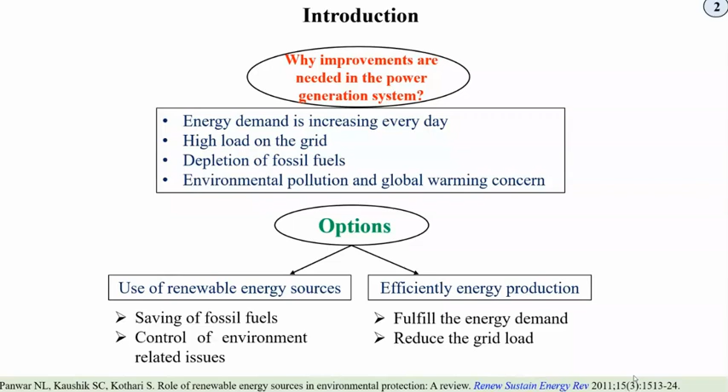And it is increasing day by day. These are some well-known school-level observations on the need for exploiting or harvesting renewable energy sources, and to reduce grid dependency, because for a country like India, more than 65% approximately is being catered by thermal power plants, which are fossil fuel based.

These are some consolidated projections of how renewable energy... some studies actually report, I said 60 but it's actually around 52 or so, but more than half is being fulfilled by thermal power plants, and we can see this renewable sector is not up to the mark. There are challenges, but the research that needs to be done has not been up to the mark, to say the least.

One of the key areas is waste management. If we talk about waste management, the staple food in India is agriculture, say rice and wheat, but the biomass generated from these agrarian resources is also not well managed, to say the least.

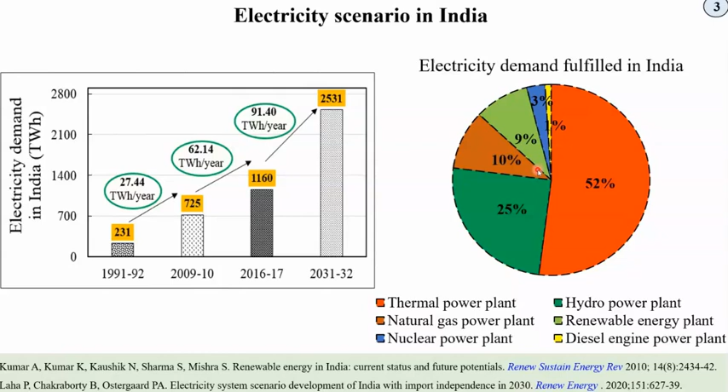So this is the energy demand and how it has to be fulfilled. These are some of the energy sources that can be found. We have been working on this—a few things like solar ponds—but this is not the main theme of today's discussion due to shortage of time.

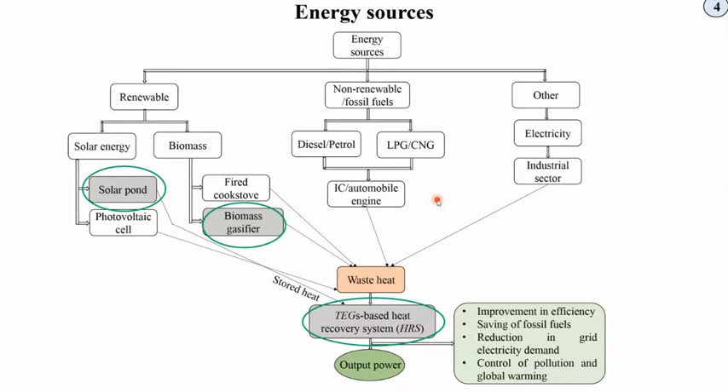I'll just focus on some applications of biomass gasification and what we have done here, how to improve it, and suggestions are also welcome.

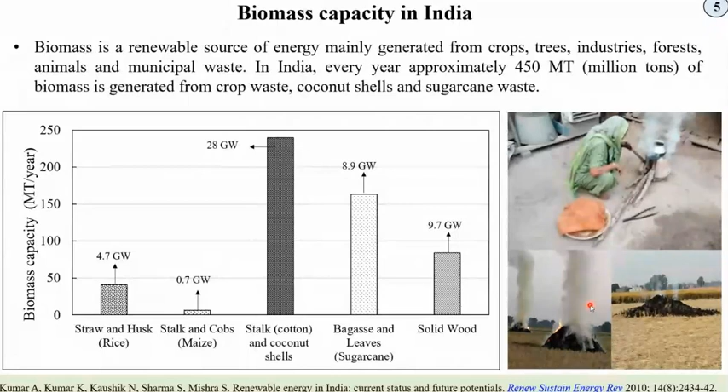We can witness this in our day-to-day life, even in remote villages. These are practices near a village at IIT Ropar, not taken from any published literature—these are real fields. Whenever the harvesting of the crop takes place, the farmers set fire to the field, creating stubble burning, disposal-related problems, and many environmental issues.

So these are the problems, especially in Punjab and the northern sector, and I'm sure it's taking place throughout the country, because farmers want to prepare the soil as soon as possible, and disposal of this waste is a challenge.

Now, what we have been doing—these pictures show field conditions, wooden scraps, and paddy straw. Since time is short, I'll go through the main techniques we are following and how we utilize this for useful purposes.

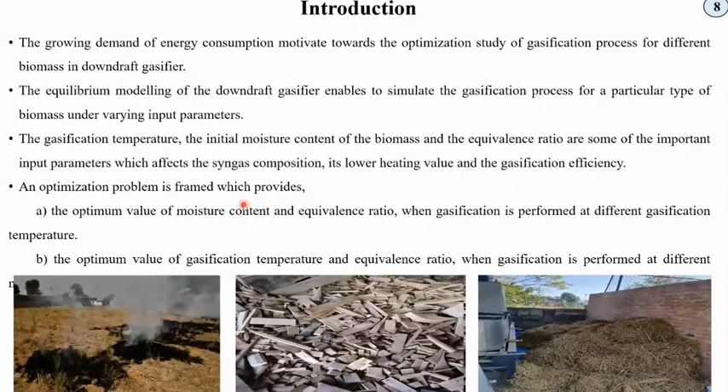First is biomass gasification. There's a lot of biomass involved. Before that, since students here are PhD or master's scholars, some basic theoretical analysis should be known—like ultimate analysis, proximate analysis, and so on. These can be done.

This is our biomass gasifier setup—a downdraft type biomass gasifier, which consists of a hopper and has zones like a drying zone, reduction zone, combustion zone, and so on. This process produces syngas, mainly composed of hydrogen and methane as constituents, and there are filters to clean this gas.

So we have this setup, and we have another setup of 10 kilowatt electrical capacity. So this is our engine here. Now the question comes that if we are using a gas and doing combustion, we still cannot eliminate the carbon dioxide completely, these greenhouse gases. But the advantage is the emission which is taking place, because this genset is something like a diesel generator, but it is not operated with diesel, it is operated with syngas,

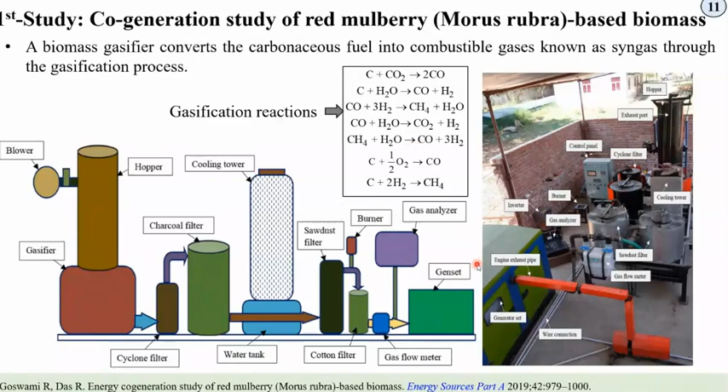that is like this. So we have conducted a small study on this red mulberry, because this is known as shahtoot at our place. So those dead branches and other things, we have studied them, and this was published some time back. And so this is one of the techniques. So these are the characterizations.

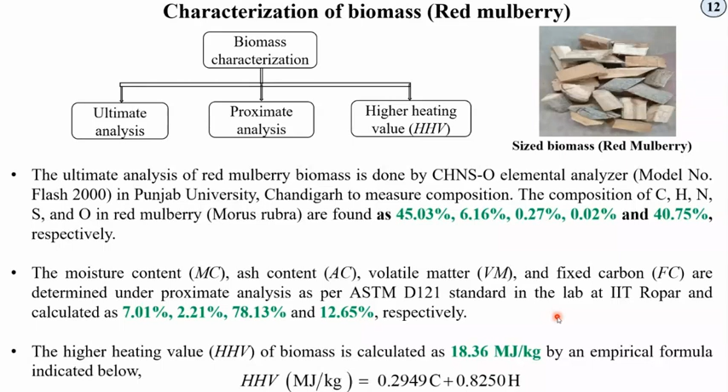So we can do the characterization even at our lab, and if some resources are not there, there are a lot of other institutes and research organizations like CSIR and even some other universities. So these are the ultimate, proximate, and heating values and other things. So these are the standard formulae. So if you require anything, please feel free to contact me at my email address shown on the first page.

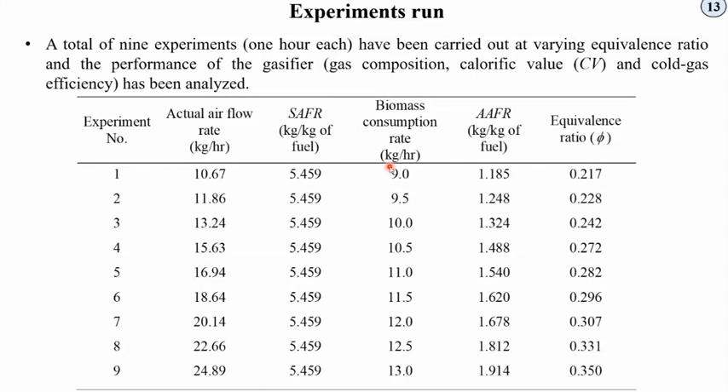Now, these are the technical things. Stoichiometric air fuel ratio, how much it is, then what is the biomass consumption rate, and what is the actual air fuel ratio. And there is something called equivalence ratio, then fuel to gas ratio, cold gas efficiency and so on. And these are some of the standard analyses, like we take a set of data, statistical analysis. So these are a part of, we can say, a typical thesis,

or just a second, I think some message is coming. Let me check it. Just a second. Okay. I think some message was coming. So anyway, I think I can go ahead.

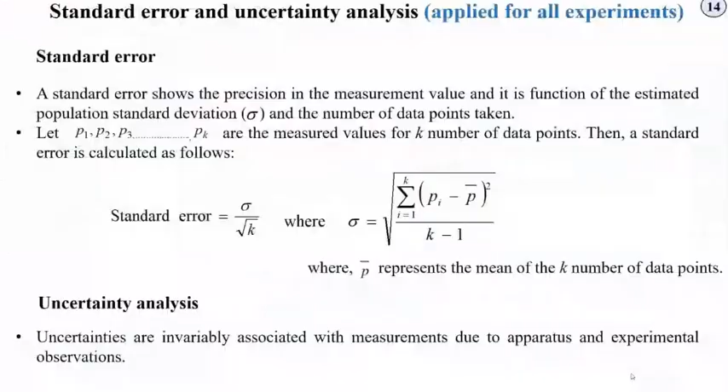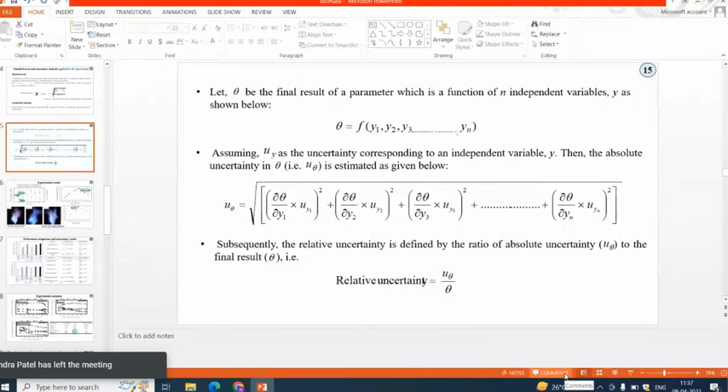Excuse me, sir. Pardon? Sir, on the previous slide, you were explaining about the uncertainty test, I think. Yes. Can you elaborate a little bit? Because we are struggling with that. No, it's okay. You're free to contact me or any of my students. I will just spend 2 minutes then.

This is nothing, because, for example, we measure power, and say power is nothing but 2 pi N T by 60. Yes, sir. Correct. So here, say theta will represent power. I am just giving a small example, because there are a lot of measured variables. So if my output variable is theta, for instance, say power, then theta is power, and it's a function of N and T, 2 pi N T by 60. Now N is measured with the help of, say, a tachometer.

Well, and T can be found by, say, load and the distance and other things. So there is a weighing balance. It may be either a digital type or an analog type. So always there is an uncertainty in the individual measurement because there is a least count. Even if we take a vernier caliper or a micrometer, maybe a digital sensor, there is some uncertainty.

Like, for example, the scale we use in engineering drawing. There we can say that the least count is, say, 1 mm. So if a reading is between 1 and 2 mm, we are not certain about that reading. So that is based on the least count. So there are always certain uncertainties, even in digital media, for example, voltage or current characteristics. There is some least count. So the uncertainty in individual measurement, how it is propagated, and how it is affecting that power.

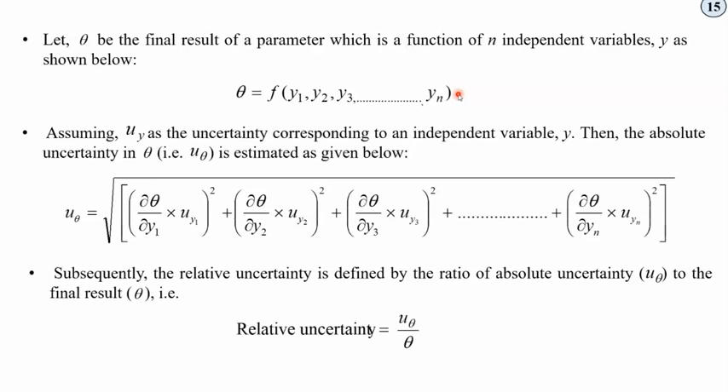So these things can actually be differentiated, right? Because del p by del n into uncertainty in n. Suppose uncertainty in n is about maybe 10 rpm, so that will be 10 over here. And similarly uncertainty in, say, load is 0.5 kg, so y2 will be 0.5, and we can differentiate because this is a mathematical expression. So I think it is quite obvious, and there is not much difficulty in evaluating this.

Then what we do is look at the various equivalence ratios. If this is not optimum, that means my air supply to the biomass engine or the gasifier is not optimum. We can see that there can be soot particles, or maybe excess burning of the N2. So the flame may not be a fully bluish flame, but at an optimum we can get it, and that is quite evident by seeing the trends of the average calorific values and the cold gas efficiencies. So we have to basically operate the biomass gasifier over this region.

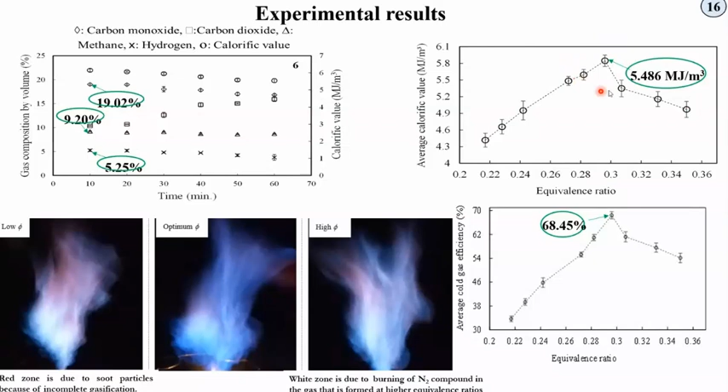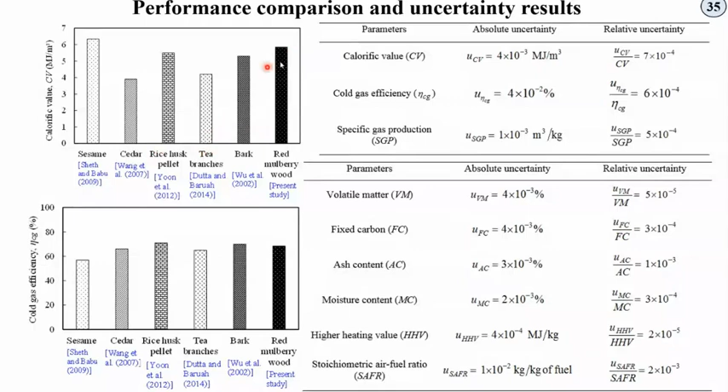Now these are certain comparisons we made for our biomass, and it is quite decent. It may be superior to some of the studies, but it may not be up to some of the other studies, but this can be a suitable thing. Now these are some of the trends, which again I am not explaining each of because of a little bit of lack of time.

So we studied 3 types of biomass. One is the dried grass, leaves, and dead branches. So not only does it help to clean the nearby campus, but it can also lead to some production. And that place I showed you, we don't have any grid-based electricity connection. So every power and other requirement we are fulfilling by either solar or the biomass. And of course, a battery storage that I will discuss.

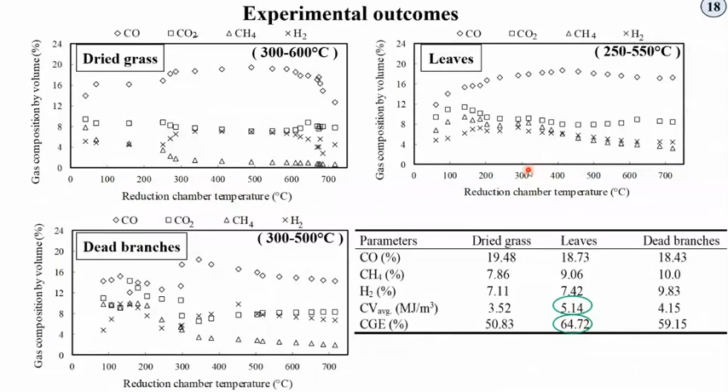Now, these TEGs have some maximum temperature sustaining limit, maybe 150 or up to 200 degrees centigrade. But these gases are at very high temperatures, of the order of maybe 450 to 500. So it's very high, so we cannot directly utilize that. So what we did is we kept two containers of water, and we are heating the water to some temperature which is lesser than that, maybe even well below 100 degrees centigrade.

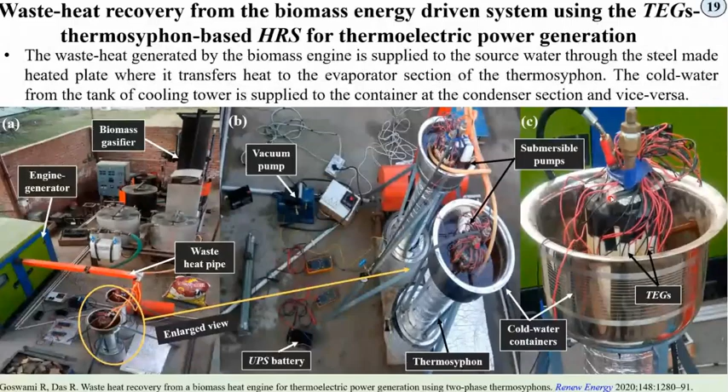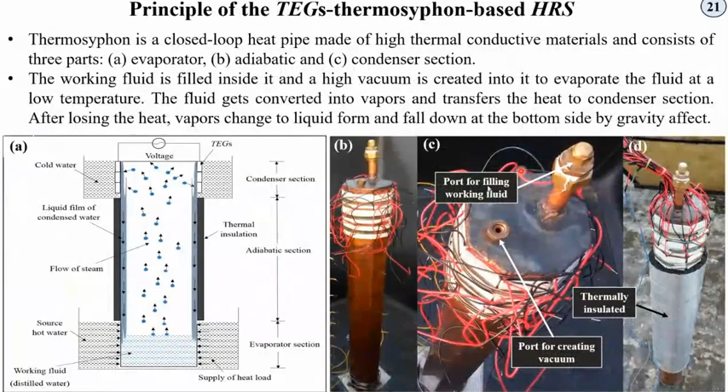So this is the concept, and this is the port for creating the vacuum inside this thing. And these are the TEGs. So we have considered bismuth telluride, with the specifications shown over here. And yeah, so this is basically the principle of the thermosyphon, how we have made it, and for

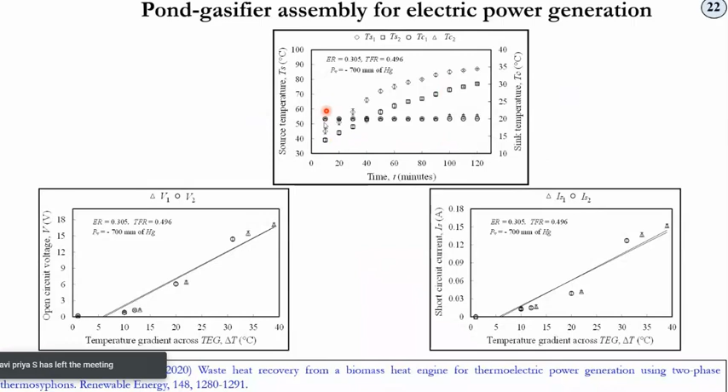what application. So these are the typical voltage-current characteristics, and the temperature over time, how the source temperature is changing, and the variation of the load on the current and output voltage. And the conversion efficiency, well, this conversion efficiency is not very high for TEGs, so there is an opportunity to carry out work exploring various semiconductor materials, but that was not a direct purview of our work.

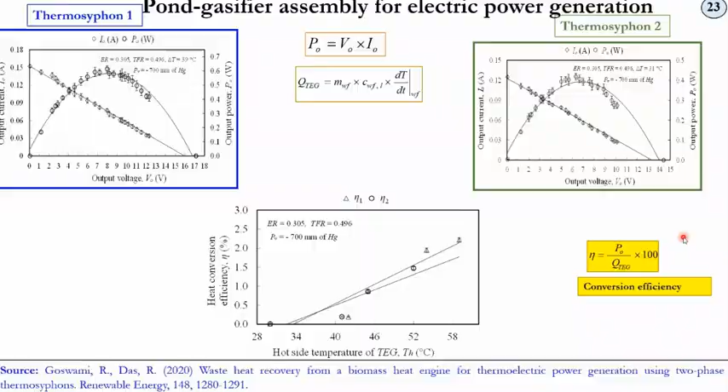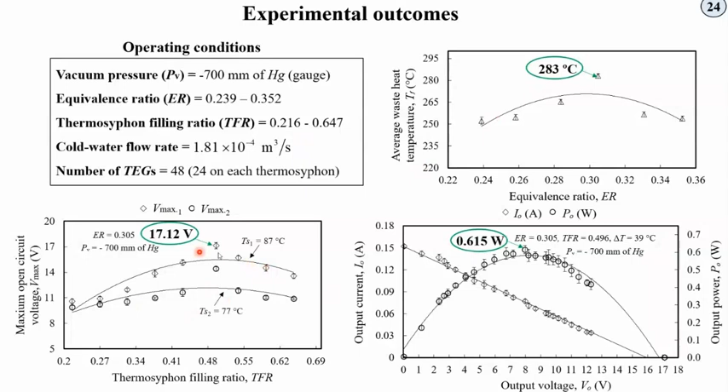Our work was more application oriented, and these characteristics we have studied at different filling ratios. That means we are varying the amount of working fluid within the thermosyphon within this range, and there is certainly an optimum TFR, beyond which the performance is not so good. And this is a demonstration of our

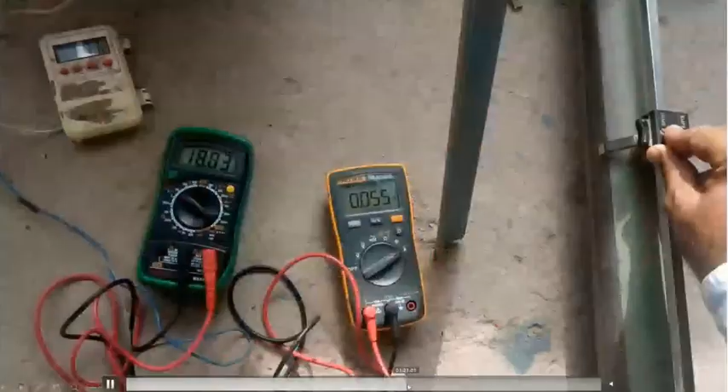So this is a typical battery recharging thing, because the current that is being produced by the thermoelectric generator, even though it is not quite high, can still be used. And this is one of my scholars who was working in a project, and these are the current characteristics, voltage and current, and this is the variation of the load by a rheostat, and using that we can get those graphs. So this is one of the processes.

And next I will show you for what purpose we can use that electricity. We can use it for plenty of applications. First, we can use it for charging a small UPS battery, which are used in many places in our day-to-day observations. And we can also power the battery banks, say in a computer platform or any other thing.

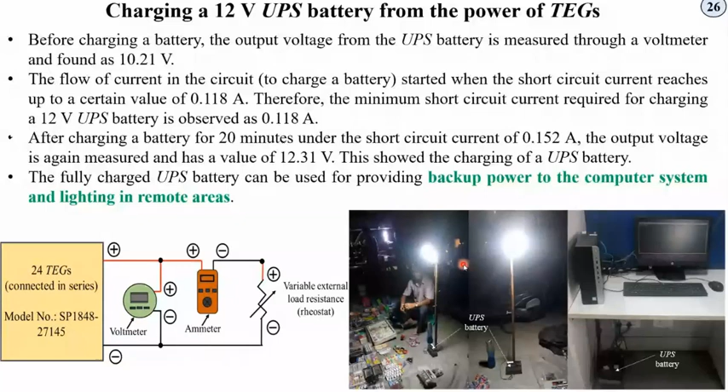So these are some small scale applications, because the power generated using the thermosiphon based setup was not very high. So we want to use it for larger scale applications. So why not get rid of the vacuum and other things, and try to derive more power. So we have devised a small heat exchanger like this, which can accommodate more TEGs, so that it can generate more power, and in that process we can even recharge a high capacity battery, for example an automobile battery, or an inverter battery of our typical house.

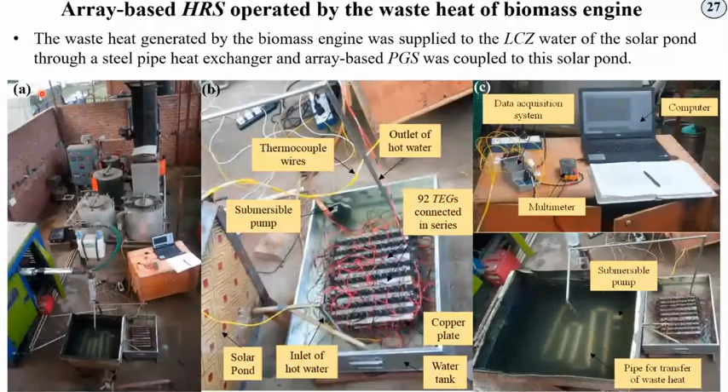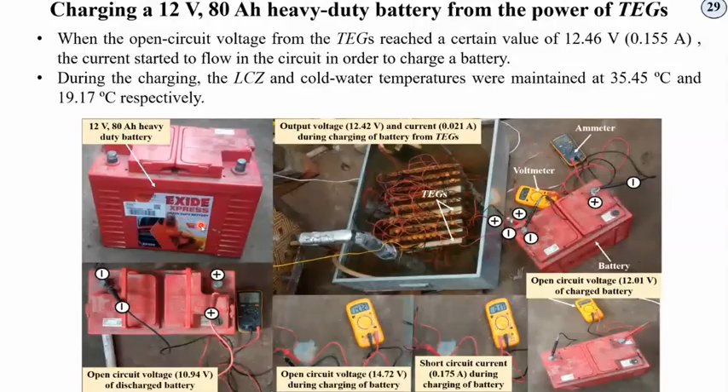So these are some of the voltage, current, and other characteristics. Further discussion can be found in our research paper, and this was the battery which was recharged using the thermoelectric generator and the heat exchanger. This work is still under review in one of the journals, and we have got the comments recently, and they are positive. So we hope that soon we will have this online.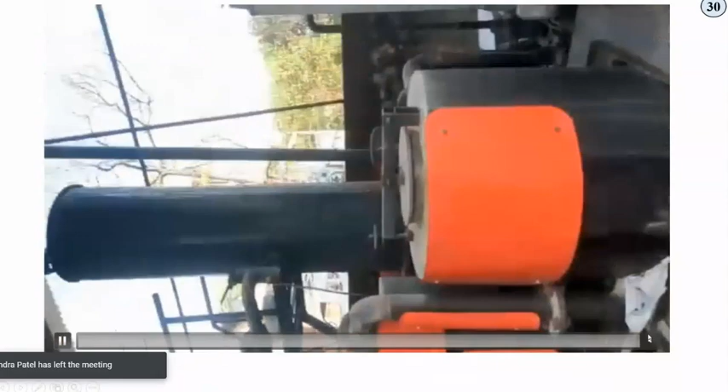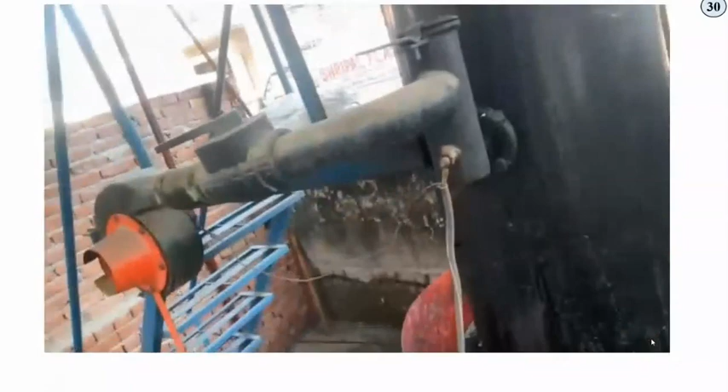Now this is a biomass gasifier working. It is quite noisy, so I am putting it in mute mode, because we have removed the silencer for the waste heat recovery, but if we put the silencer, it is not that noisy. So just a second.

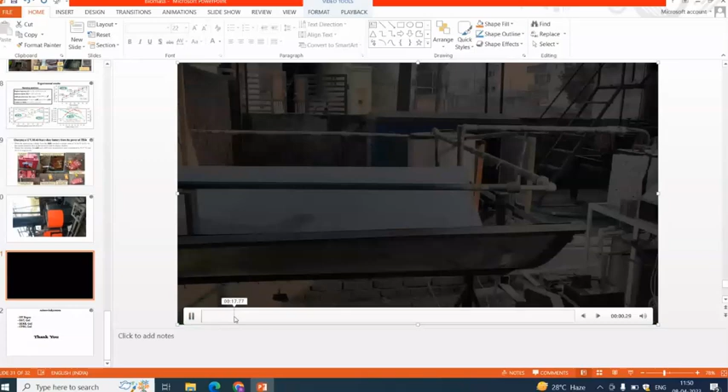So this is okay. So this is the setup, and I will lower the voice a little bit.

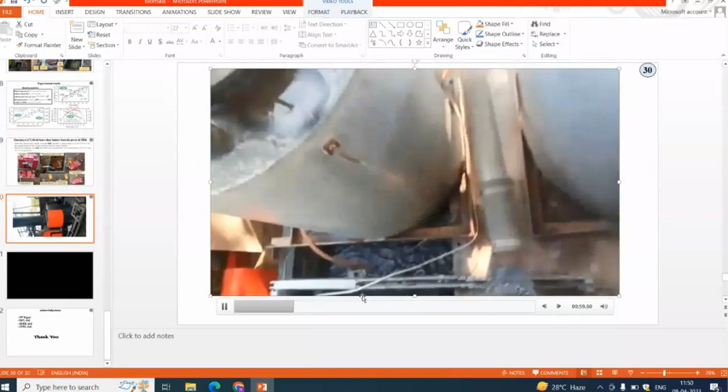So these are basically the typical components of the gas generation, because the gas needs to be cooled as well as cleaned, otherwise hot gas is supplied. So these are the filters basically for cleaning of the syngas. And this is the typical engine which is being run, and these are the control panels for monitoring the setup.

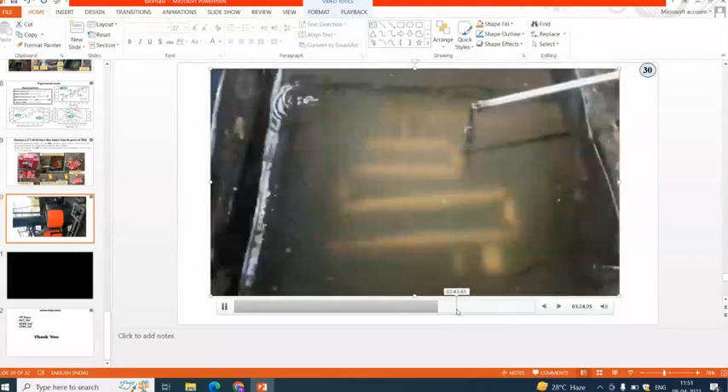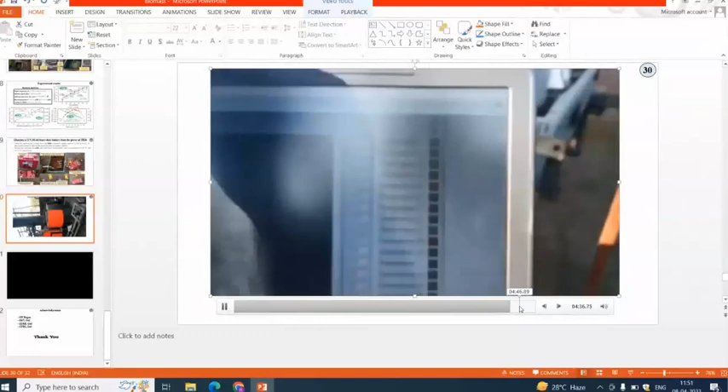And this is our setup. This is the typical setup, and this is the solar pond. So there is a lot of work on this for extracting the thermal energy from solar ponds, and these are the typical temperature variations in the control panel. So this is it in a nutshell.

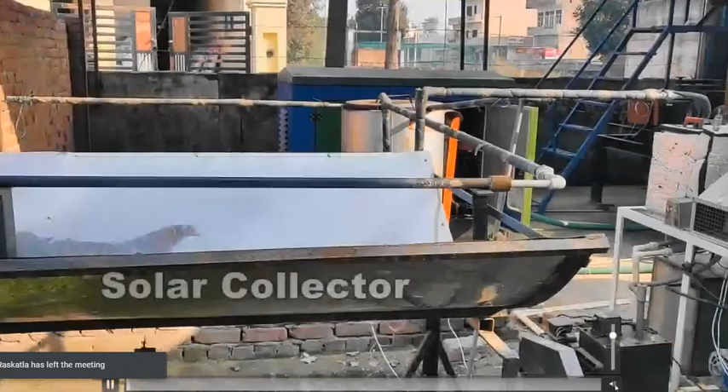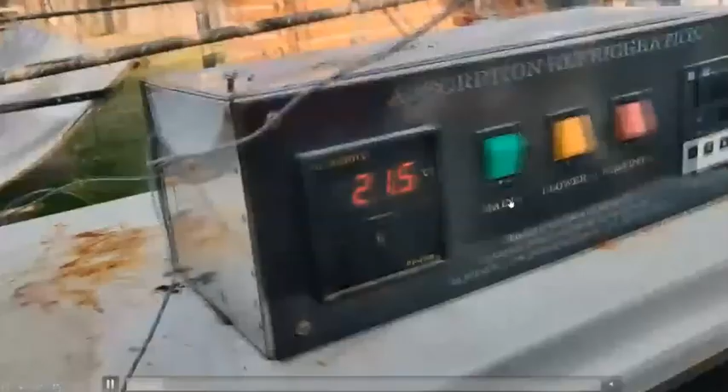Another application, actually the last of the applications, is for the purpose of air conditioning. So we have developed a small scale absorption based system. This is the novelty, and recently it has been submitted for patenting, and we can see how it is completely operated with the help of renewable energy.

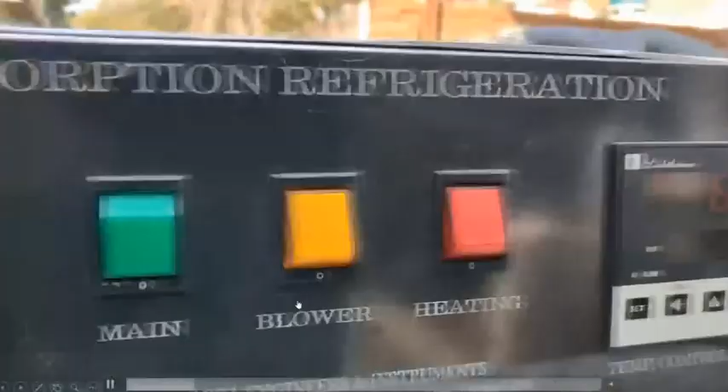For an absorption system, we know that we require hot water or some thermal energy source, and these are some of the FCUs, meaning fan coil units. Just a second, sorry. And the temperature reduction that we have attained, and this is the genset basically.

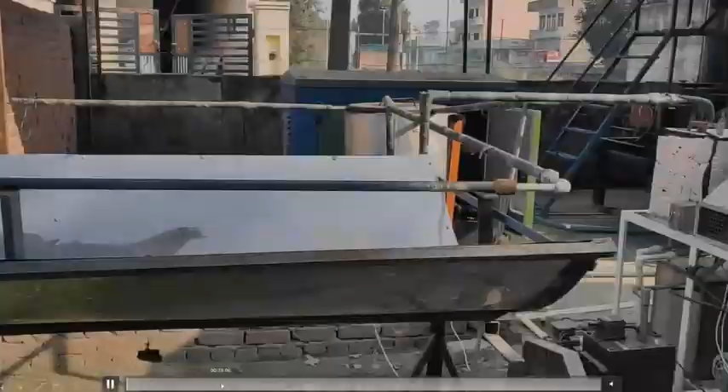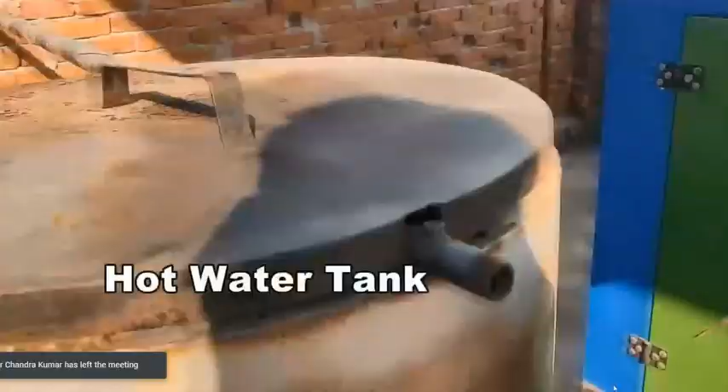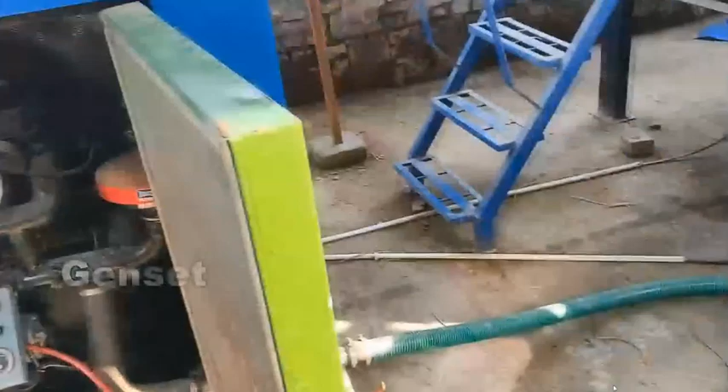And this is another gasifier, which was done by another scholar. He has defended the thesis recently, and this is the same genset but used for air conditioning purposes, and this is the gasifier. So the main thing, I will not spend much time.

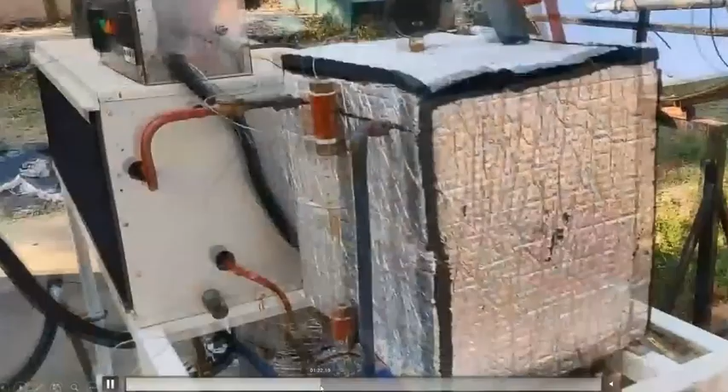The temperature that we have inside the room, we have generated an artificial load by... some problem is there with the video. I don't know if it will start or not. So about 10 degrees reduction we have achieved using this setup.

And I'm sorry, this thing is hanged. Just a second. I will not spend much time, but just a second. Yeah, so I will directly open the video rather. This is fine.

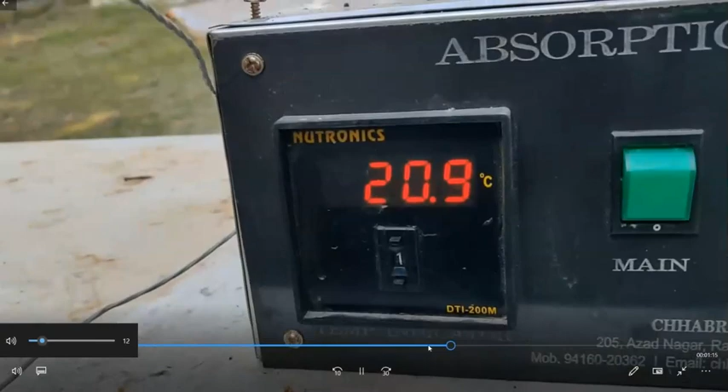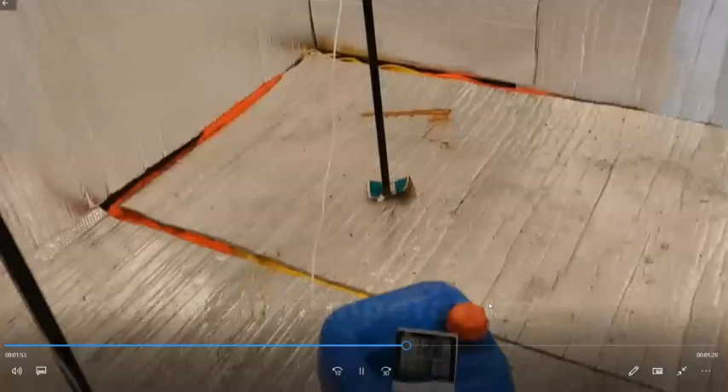Yeah, so this is the load generation. This is the process of load generation, and this is the FCU, the fan coil unit of a typical air conditioner. And the room air temperature when we started was about 33 or maybe a little bit more. Let me check it. So this is the test room with the load generation. We have used many bulbs, and the chamber was totally insulated from outside. This is the test chamber, and the room air temperature was 32.8,

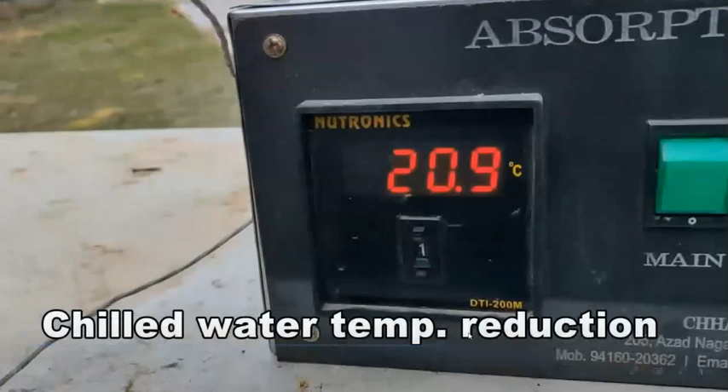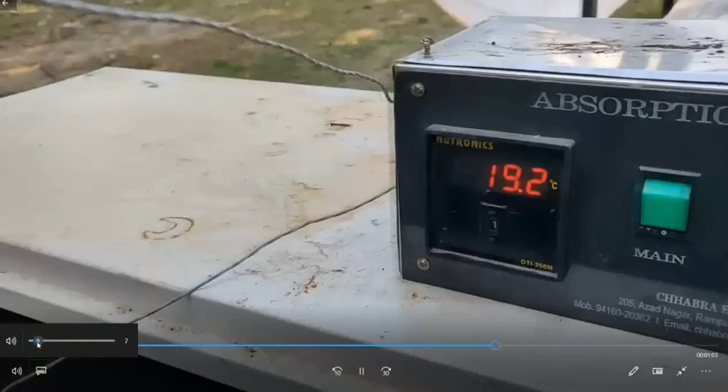and this is the chilled water temperature reduction. This technique is eminently used even for large scale air conditioning. And you see now the temperature of the chilled water is reducing. We have achieved up to maybe 15 degrees centigrade probably.

And this is before the experiment. The temperature was about 36.5 degrees centigrade. And when we supplied that, it is fully renewable energy assisted. And these are various sensors which are located.

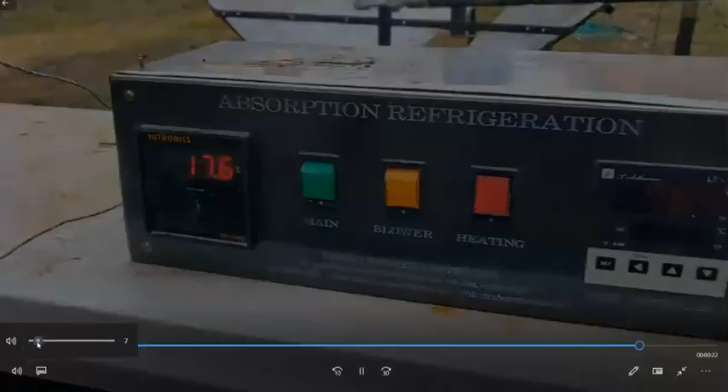So this was the outdoor air temperature, and the chilled water temperature is now increasing because this chilled water is being sent to the room, where it gains the latent as well as the sensible heat from the indoor space. And now we will see that it is increasing gradually.

This was also supported by one of the DST projects, and finally we can see that it is roughly 27.6. So roughly we achieved about 9.5 to 10 degree temperature reduction. Of course, there is more scope for improvement, and we are still working on addressing the problems.

And finally, I would like to conclude my talk. I thank the funding agencies, our institute, DST, SERB and CPRI. I have not mentioned the names of my students because there are a lot of students at UG, PG, and PhD level, and a lot of collaborators. So I'm sorry I could not list all of their names. But majorly the money has been obtained from there. So this is the small work which we have done. I have tried to consolidate it in the best possible way.